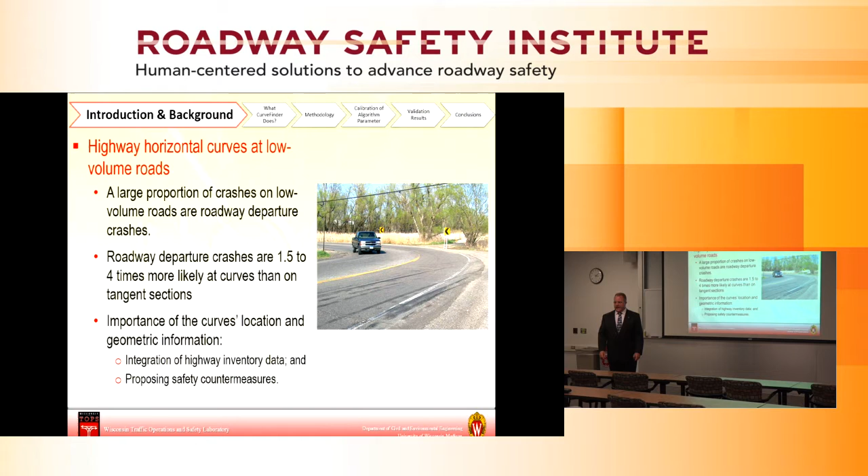What have we done, or what has the world done in terms of trying to address a similar problem? Well, we live in a wonderful world of technology now, don't we? All different types of tools available to us to help solve these problems.

So related to our topic here of horizontal curvature, there's lots of different sources of information now to get a bird's eye view, if you will, of this network of roadways that exist and all the different alignments that are out there in our transportation system.

So we can look at satellite images. We see that online so nicely now, right, with all the Googles and the Bings of the world that provide that information to us free and easy.

Very, very wonderful tool. We can use various other types of GPS survey. There's laser scanning methodologies. Back in my good old day, we actually surveyed it the old-fashioned way, right, to come up with that data. And of course, what do we know about all these different topics here that I just mentioned? It takes time, right? It takes money. They're not always as efficient as it possibly can be.

But what we also know is that there's this big world of GIS out there, Geographical Information Systems. And GIS systems are pretty easy to use. And most states have them in a very usable format.

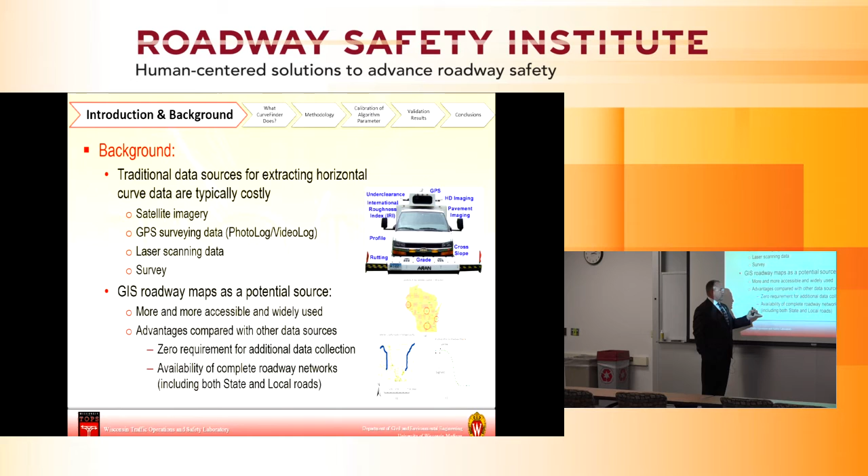Some are better than others. Some are linked better than others. Some have the data better connected than others. But nevertheless, GIS provides a very accessible way with the advantages that I've identified here that says in a very, very, very cost-effective way, we can get this information we're looking for and get the information we need to make important safety-based decisions. Do you all agree with that?

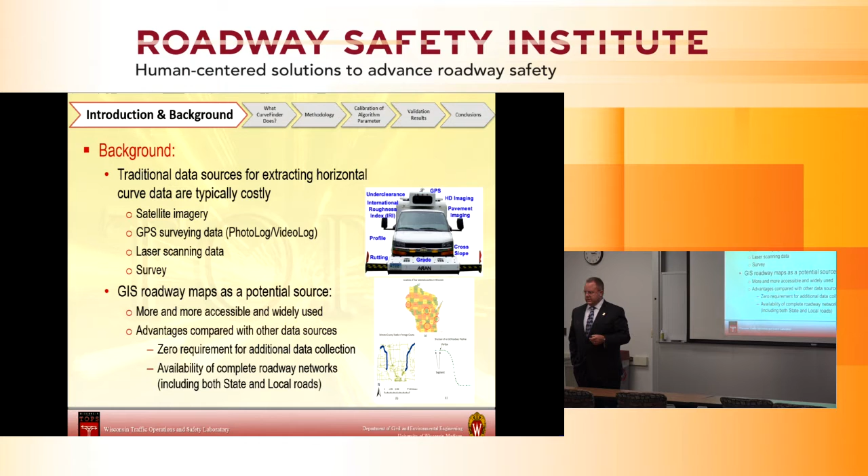So let's look at it a little bit further. So here's what we thought. So we came up with this acronym or this word Curve Finder just to define what it is that we were doing here. And again, we're not going off the deep end here in terms of coming up with this novel idea. We just simply are saying this.

What if we can automatically detect all these curves? Run a simple algorithm, detect the curves, get the curve data, and we're not spending hours and hours and days and tons of money going out and trying to survey in some way, shape, or form all these different types of data.

And if we can do that, we can automatically classify curves and compute the curve data, right, that we all learned in our basic transportation engineering courses, right, the tangent lengths, the radius, the degree of curvature, all those very fundamental things that are part of every transportation course. If we can do all that in an automated way and then create the GIS information that we need in a layer that can overlay the various systems that exist here, wow, that's not bad.

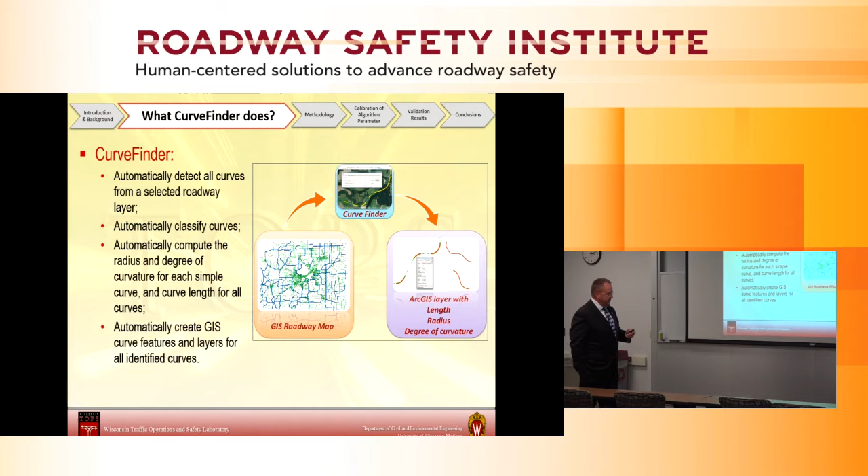Pretty good stuff, right? So we'd have the information we need and we'd be able to use it in a good way. Now, were we the first to think about this? Gosh, no. Lots of people have been thinking about this, including the Federal Highway Administration.

Some of you may be familiar with this model inventory, or model inventory roadway element, so the acronym MIRE. Lots of information, so I just put a screenshot of the website up here, so if you're not familiar with it, you may want to go out and take a look when you have some time and Google that.

But there's lots of information, and the whole idea of coming up with a set of important data that are necessary if we're going to make good safety-based decisions across our system. Okay? So we have all this, and the reason I'm pointing this out to you is we wanted to make sure...

...if we're going to go down this road of developing something that we call Curve Finder, that we don't want to forget about these important other sources of information that exist. So we want to parallel it and use it and perhaps make it a little bit better if at all possible.

So we said, well, let's look at some improved way to do it. So we certainly want to be compatible with the MIRE federal system, okay? And we certainly wanted to be able to do the same things that MIRE does, such as identifying different curve types, whether they're traditional circular curves or perhaps they're compound.

We want to be able to look at the angle points. We want to look at the independence between the curves. We want to know if they're reversed or not, and all the different combinations of curvature we can have along any type of roadway that exists within our system.

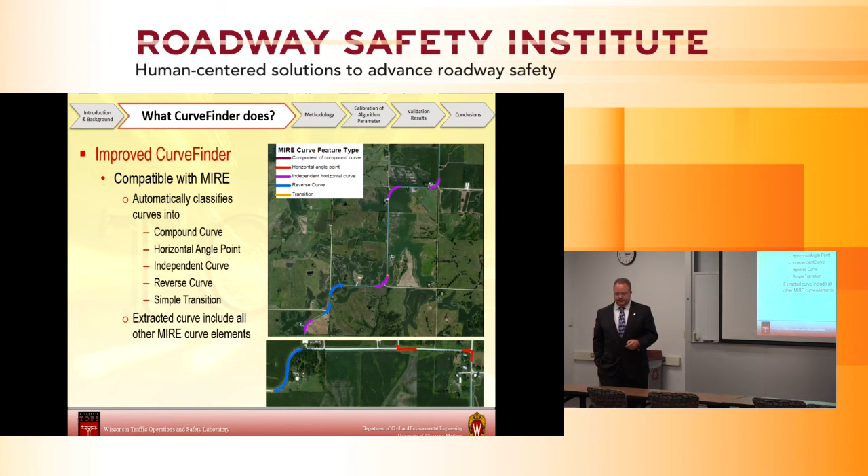So far, so good. Right? Everybody with me? All right.

Now, the one thing we simply can't do under this methodology is superelevation, determining how much we're banked. So that's still a challenge. Every researcher has a future research component at the end of their work, and I'll tell you right now, that's one of them. How do we do that? That's a little bit more challenging.

But with the ones we can handle, including curve feature type, the degree, the radius, and all the other fundamental parts, those are very doable. So what we're looking at is identifying the angle point, looking at the independence, or what type of curves we have out here - are they reverse or compound? But what's going to be the challenge?

What's going to be the challenge? Well, we don't have the perfect world out there. Not every horizontal curve is nice and smooth. We have curves that snake, that aren't as easy to identify in an automated way. So we're going to have to find a way, when we have these unequal or irregular - however you want to describe it - compound type curve, how are we going to be able to identify that within the system?

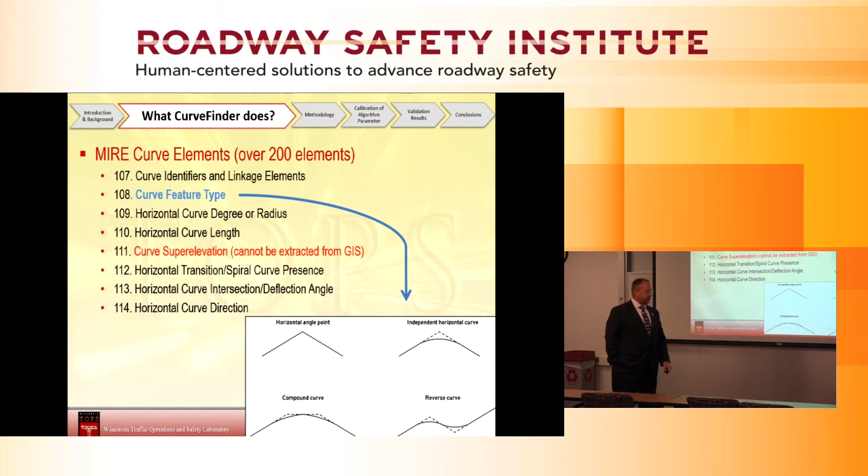So we dug a little deeper into the GIS world, and I'll be the first one to tell you that's where my research team comes in. That's not my in-depth expertise in understanding the ins and outs of the software. But like we say in research, you learn enough to be dangerous. So I can tell you a lot about it, but if you want to ask me how to operate a GIS system, save that question for another day, because I'm not going to be able to answer that for you. But we will be able to talk about some of the details.

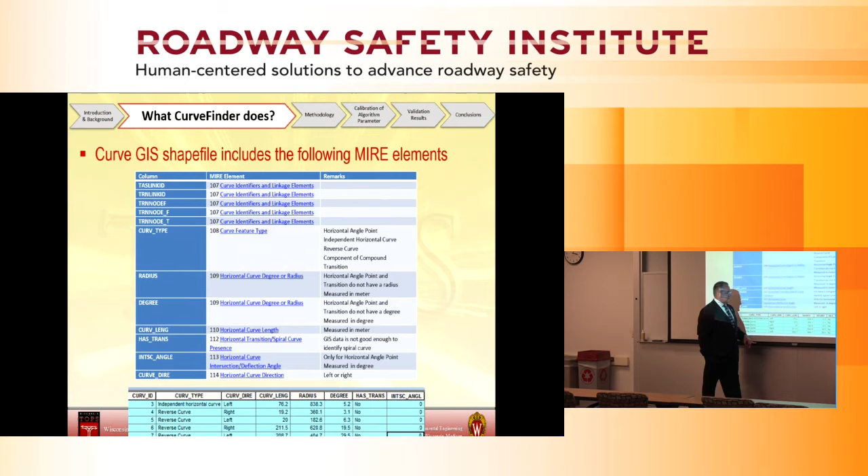So again, we're digging a little bit deeper into MIRE and the other things we want to be concerned about, and it gives us a whole array of things to say, well, if we can't make the system better than this, then why? Let's just stick with what we have in this program and this database. But we thought we could make it a little bit better, a little bit easier, automate it a little bit, and then develop different types of systems to get to this fundamental curve data we're looking for. So, Curve Finder.

The bulk of it is super, super easy. What are we trying to do? Well, I'm going to work backwards, meaning at the end of the day, once we've identified this curve in our system, we just want to identify the PC, the PT, and then overlay the fundamental components of a horizontal curve, and then tell you what the radius is, what the length of the curve is, the tangent lengths, where the PI is, etc. That's what we want. That's the data we're looking for.

And in order for us to do that, we're going to have some sort of algorithm here. This is an algorithm in and of itself in making this calculation, but that's an easy one. We need to have some form of an algorithm that's going to tell us what kind of curve it is - simple horizontal curve, nice circular curve, is it compound, is it reverse?

Is there some spacing between the curves like there's supposed to be, at least according to the geometric design manuals that we all know? So we have all these other things that we have to identify, so we need some sort of algorithm to do that. But here's the key one: somehow or other we've got to know if it's a curve or not.

What we do know is that in these GIS databases, we have segments and we have vertices on each end of all these segments, and they're all linked together. In some databases, we've got to spend time with another layer of analysis to make sure we're all linked together in a nice continuous way. Some databases need to be cleaned up more than others. But once we have this linked system that goes all the way through our roadway alignment, we can begin to look at how to connect the dots, and what's happening from dot to dot, or vertices of all these segments in GIS, in order to determine what's happening from a curve standpoint.

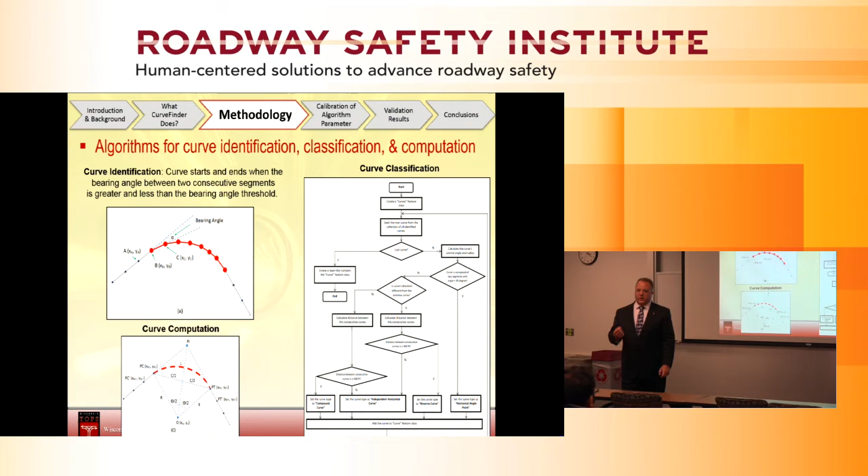So for those of you familiar with GIS and ArcGIS type tools, what we're simply doing is developing an ArcMap type add-on that we call Curve Finder. We're building it through a number of different packages, and at the end of the day, we can look at these various maps and identify in an automated way where those curves are. Simple as that.

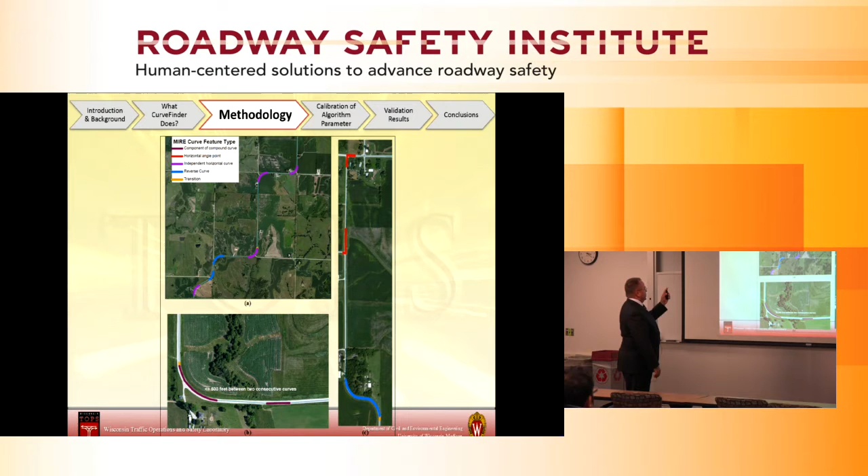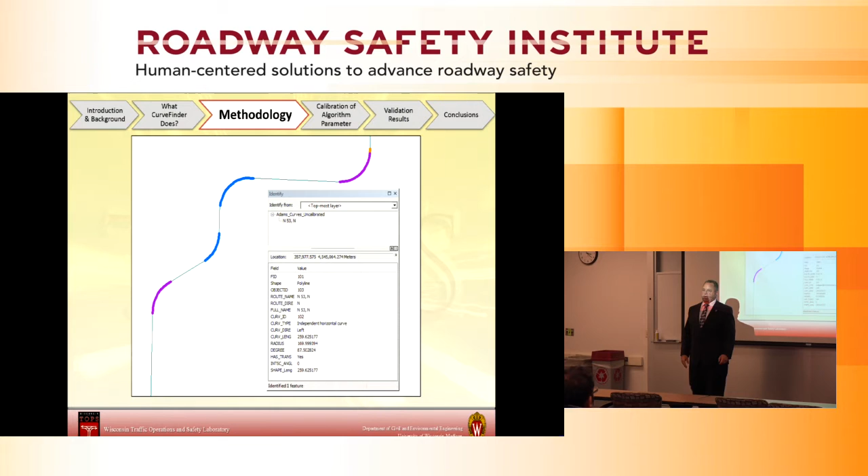I've already shown you some of the MIRE components, so we're doing the same thing here, I think we can skip that. At the end, again, we're doing the same type of thing, now just in a more computerized frame and format, identifying through all the variables in the algorithms and software, all the different types of curve length, curve direction, types, degree of curve, etc. All right, well, we developed these algorithms.

Got to try them, right? So we went to a couple counties in Wisconsin that had very nice GIS maps, one being Adams and one being Taylor. We ran the algorithm. This is what we got. Well, it doesn't look like much of a piece of information to you, does it? Just some line maps with little colored dots all over them. But what we learned really quickly was, hey, this thing might actually work.

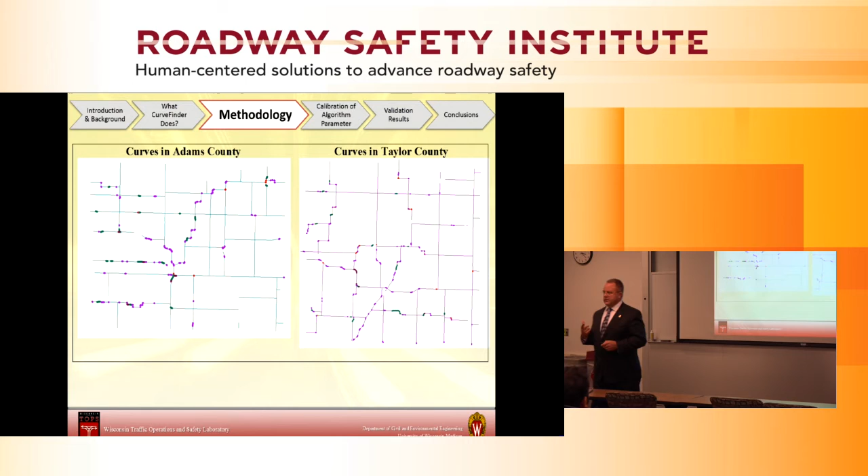It's nice when research leads to something productive that you can use. And we saw really quickly that we can identify all different types of curves in a relatively efficient manner. So the question is, what is the accuracy of this, and what else do we need to do to make sure that we are operating in a great way?

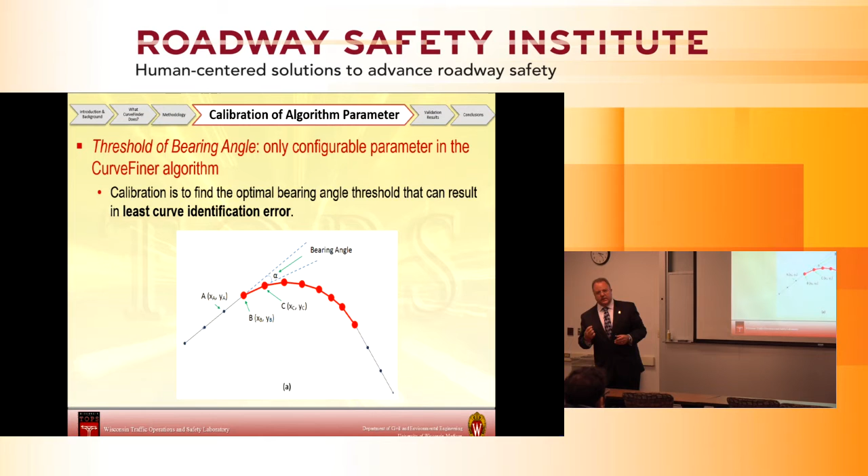So again, I told you this bearing angle is really the million-dollar question. We had to spend some time thinking about when we do have errors, what are the errors? And the one thing that we can calibrate in terms of the identification process is this bearing angle. In other words, what is the optimal angle of detection to maximize the probability of detecting a curve when it is a curve, and not detecting a curve when it's not?

Okay, so we spent some time on that. And going back to our fundamental world of statistics and error development and all the other things you've experienced, we went back to the simple type 1 and type 2 errors, and said, well, what can go wrong?

Well, we can have what we'll describe as a type 1 error, where we failed to detect there was a curve. We can have some part of the curve missing, we can have a lot of the curve missing, we can have most of it, or we can just miss it altogether. So we have some error along those lines.

Or we can have the type 2 error on the other side, and that's misidentifying a tangent section as part of the curve. In other words, looking up here and saying this is a curve, when in fact it's not.

So like all things with type 1 and type 2 errors, what's the worst case scenario? Would you rather have a type 1 or a type 2 error? And the answer is pretty simple, right?

So put this safety hat back on. If there's a curve there, we better be able to identify it. We don't want to miss a curve, right? The tangent stuff we can deal with, but if a curve's there, we don't want to miss it. So we had to think about that very, very carefully.

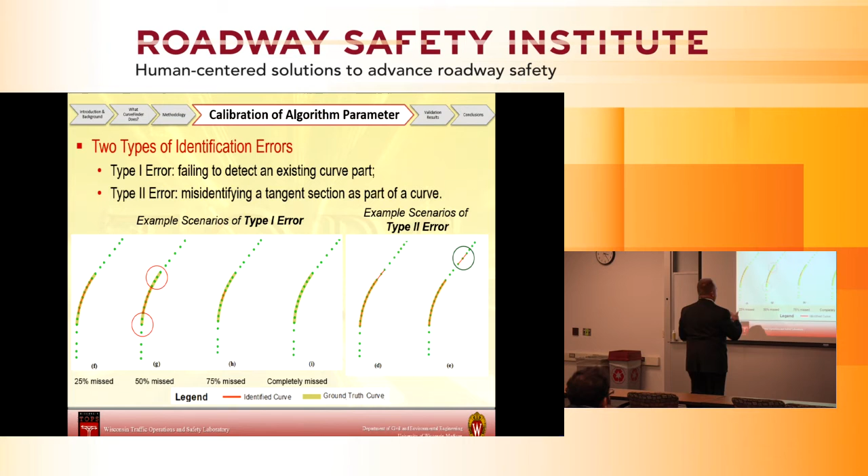So we came up with several measures of effectiveness that I won't drill down to the details on for you, but simply say this: we can look at different types of identification rates.

We can say that some percentage of the curve segments are successfully identified, obviously that's a good thing. But then we'll relate those to the type 1 errors, and then we'll come up with another measure for the type 2 error rate, and we can look at them both together and bring them together to help us find what that optimal bearing angle or degree of curvature detection is.

That make sense? So in a simple way, if we start to plot this out, we can say, and this is no surprise to you I'm sure, that the lower bearing angles here has the highest probability of being detected, right?

So if we have a very low threshold, anything bigger than that's going to be detected, and there's a curve there, so we have a very high curve detection rate.

And it works on the opposite side with type 2 errors, that if we set the bearing angle threshold extremely high, well then we're going to definitely miss curve and tangent sections, depending upon what the situation is we're experiencing out in the field, or with the mapping that we're using.

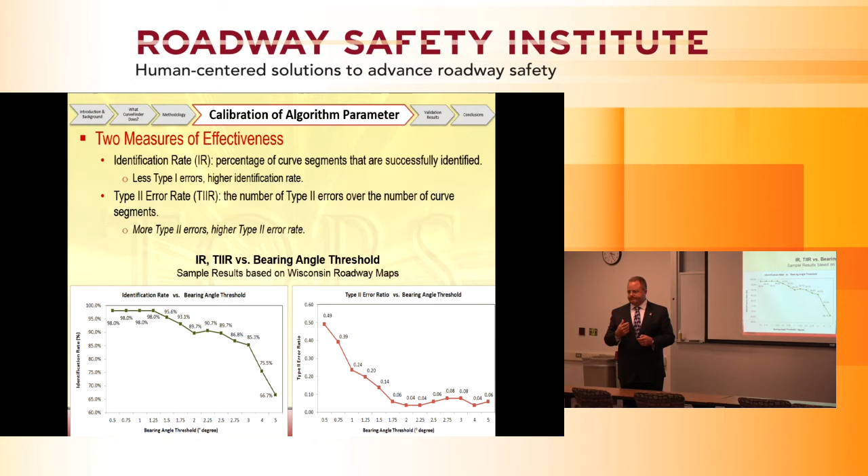Okay, so we can bring them together, and we looked at a number of different ways to try and unify this, but we said we want to put a little bit more emphasis on the type 1 errors, because those are the ones that are critical.

And depending upon where we're working, this was a case where we looked at all the curves in the state of Wisconsin. So we ran the entire state, and we had thousands and thousands of curves. We had, in certain situations depending upon the bearing angle, the minimal number of errors, right? So the number of curves that we weren't able to effectively identify.

So with this in mind, it started to become pretty clear that somewhere around 1, maybe 1.5 degrees, became a good location of a starting point of a bearing angle that we can use.

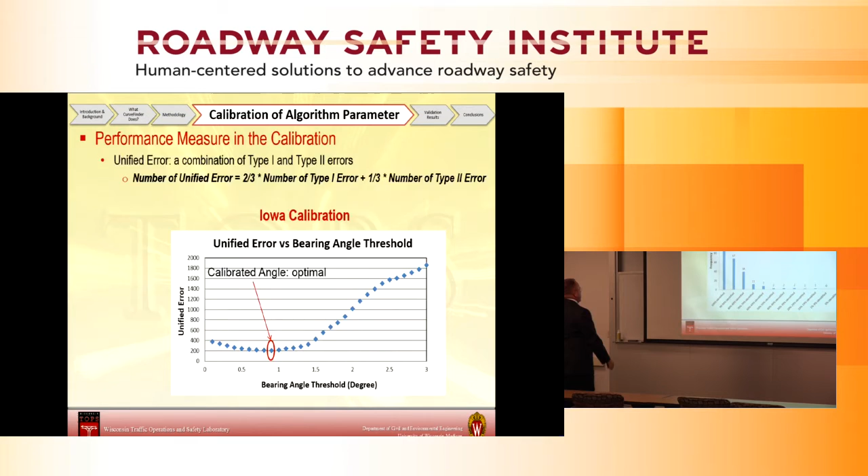And when we did that, here's an Iowa set of data from the analysis we did there, and then we took that information and said, well, let's get a segment of roadway that we have ground truth on. We know the curve data, and we can compare a known set of information to what we developed in our algorithms.

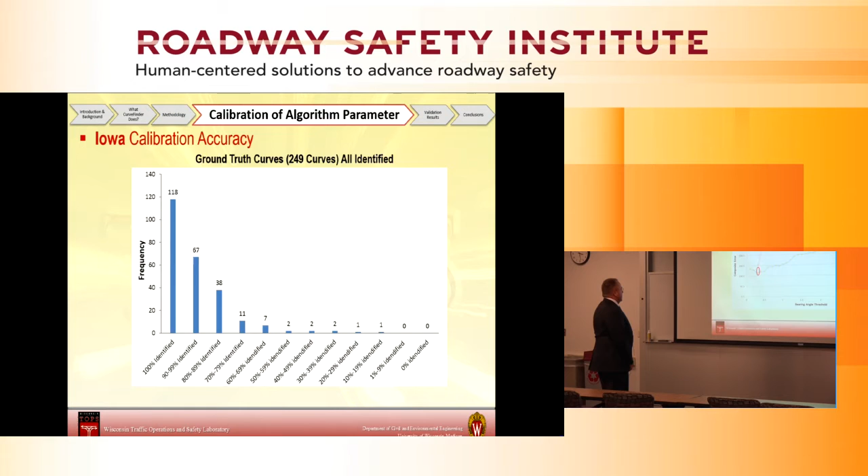We looked at a number of other states, so I'll skip through the details of each one, but we've now had an opportunity to work with a number of states around the country who saw, perhaps like Professor Donath did, this paper at TRB and said, well, this seems like a good idea. Let's apply it to the curve data and the GIS databases we have in our state, and does it work?

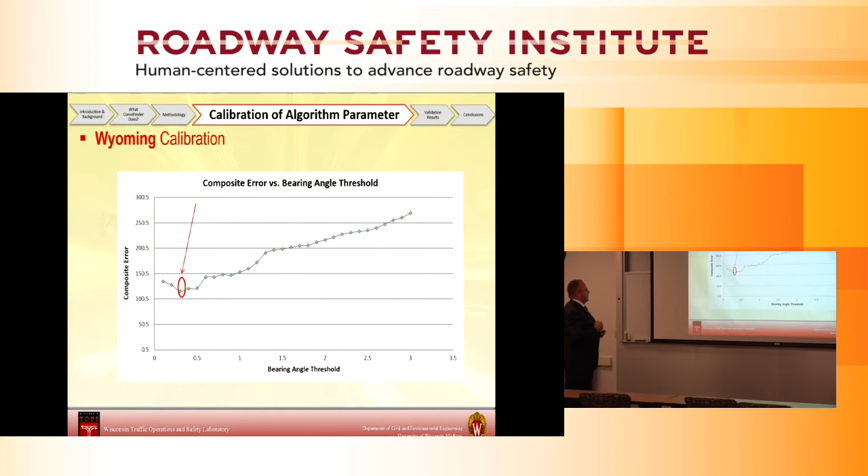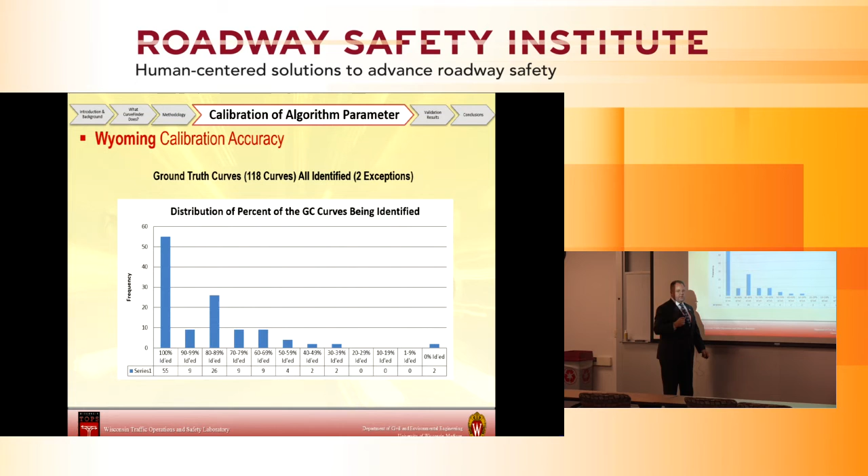So Wyoming was another one, and we again go through the same calibration process and identify about where the appropriate bearing angle is based on the roadway systems that exist in those communities. So again, through repetition, we start to drill in at the appropriate way to calibrate these models. And as we began to learn more about calibration, do we still have errors of identification, or at least in part? Yes, but we're starting to get very effective in identifying curves in an automated way.

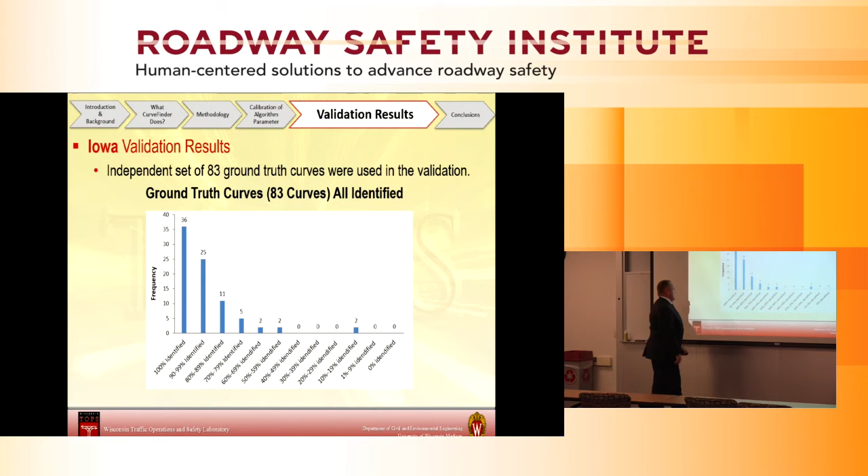We did some additional analysis in Iowa, and here's some more. But what you like when you do this type of stuff is a plot that looks something like this, right? So we're getting a nice identification rate here, and I think those are things we've already talked about before. Same way with Wyoming. Once we applied a number of ground truth related applications to it, we saw very good numbers here at the upper end.

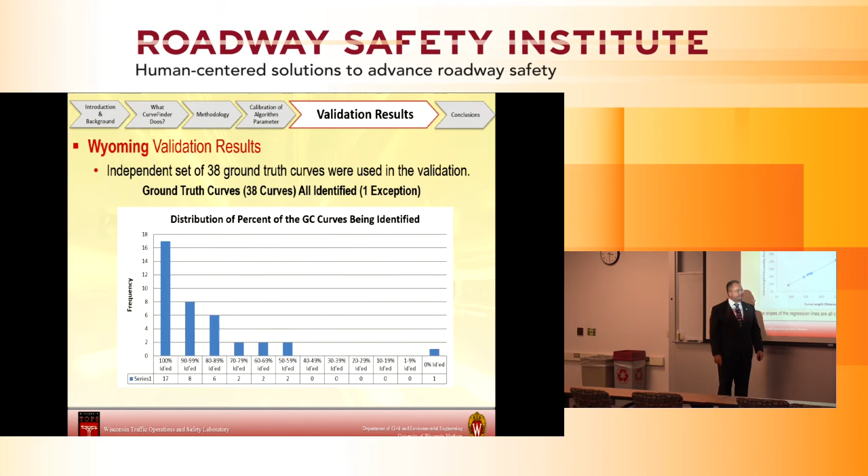So the last thing we had to do to validate it is say, well, okay, so we've identified the curves. For the most part we didn't get them all 100%, but we got the bulk of the information. But what was that last algorithm that we had? That last algorithm then took all that information and turned it into radius, degree of curvature, tangent lengths—all the very fundamental components of a horizontal curve, right?

So when we looked at that and talked about curve length first, as we've identified in a ground truth format, and what we were then able to calculate from the algorithm—if the algorithm was doing a good thing, then we would have a nice even line here, and we'd have an r-squared value of 1, right? The data is all the same. We were pleasantly surprised to see that we can be pretty close to the actual data with some of the calculations that these algorithms are doing. So when we looked at curve length, degree of curvature, and curve radius, we got very nice results in comparison to the actual data versus where we were identifying.

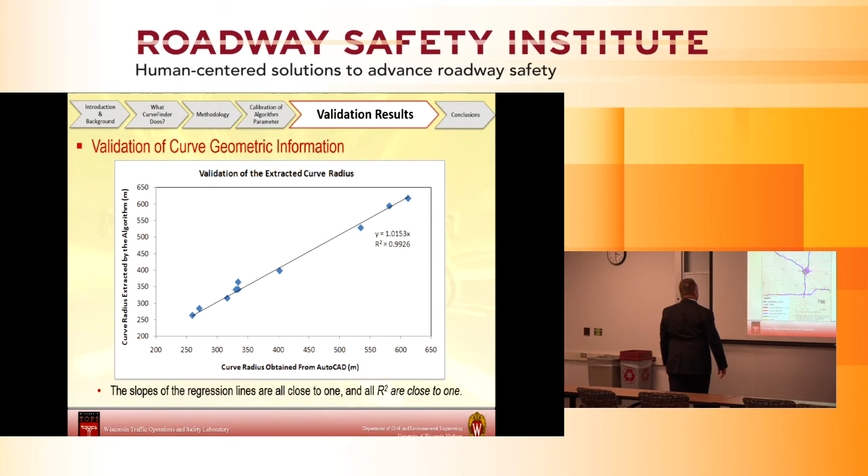So good news, right? Well, of course we had to run it in Minnesota, otherwise I wouldn't have been invited up here to talk, right? So I had to run Minnesota data, and we have talked to MnDOT a little bit about this, but have not gone through the full calibration process and trying to identify and see what percentage of all these curves we're able to get. But nevertheless, running the system, the interstate system—which I think at least in the data we looked at, about 700 and some curves were identified—and then some of the state route systems, approaching 3,000. On an initial scan, just using our trained eye, it seems to be working very effectively as well with the GIS database in Minnesota.

And every state has—I don't know what the right word is—like a flavor. A roadway has a flavor. Does that make any sense? Right? So different curves, different design practices, different ways of laying out. A lot of that has to do with the topography and geography and all the things that exist wherever it is that you live. So every state's got a little bit different flavor of how the system works. And as I've shown you, we've looked at Iowa and Wyoming, and did a run in Minnesota, obviously Wisconsin, did some work in Florida. And we're getting the opportunity to see more and more states in terms of how their world looks and how this algorithm operates.

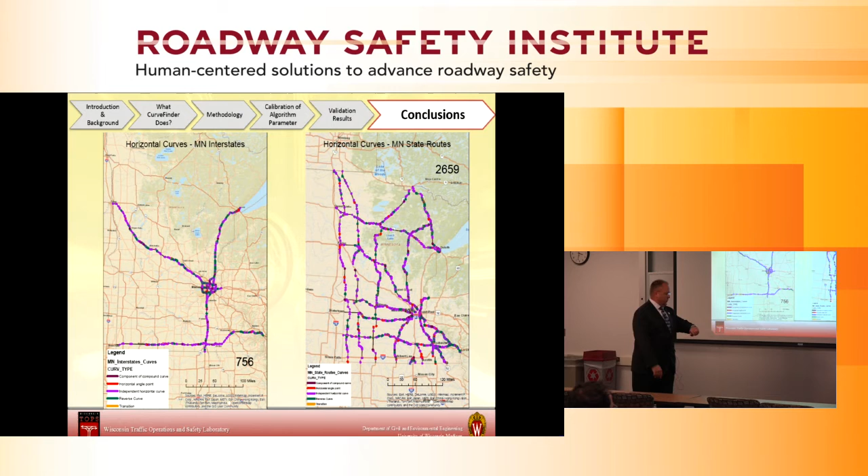So we believe that we have a pretty good system here, and in fact, the other states we've worked with and other database owners we've worked with tend to agree. Is it perfect? No, we can't identify every curve. And as I mentioned at the beginning, many curves aren't nice and clean, there's not the perfect horizontal, smooth curve on every single curve that exists in the roadway system. But for the most part, we can get close.

So we can find useful tools that are very, very easy to use. Literally a click of a button within this GIS format, we can have all the information we're looking for.

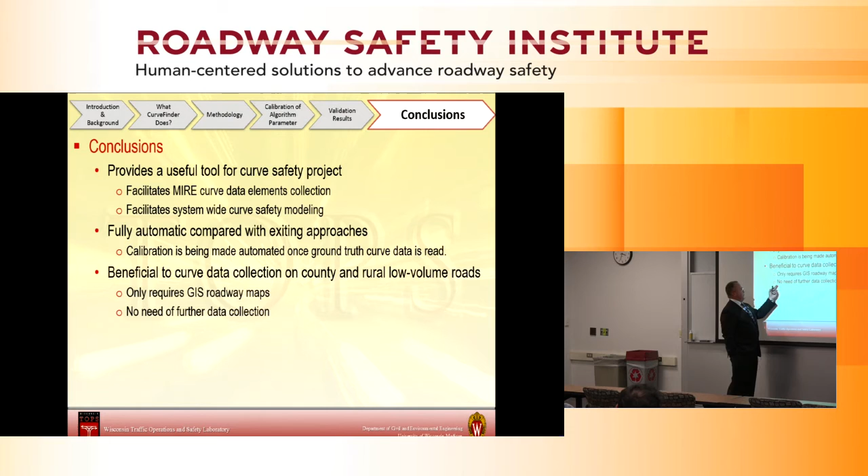So there's automated and highly beneficial ways to collect this, especially when we get to county and rural roadways where the state DOTs are not spending a lot of time, effort and dollars logging this important information. Typically what we would do is look at the higher volume roadways, and often we have that data in a database someplace. But our local roads, county roads, and rural roads are ones where we don't always have that information, so we need to continue to think about it, and we don't need further information to help us.

Now, there's issues, right? This is where you all come in, all you smart people in the audience. We still have some bugs here, and we have to think about how we solve the problems.

A lot of it has to do with the GIS database in terms of segment lengths and the spacing between these vertices at the end of these line segments, and they vary depending upon the database. Some are very tight, 50 feet or less. Some are bigger, 400 feet or more.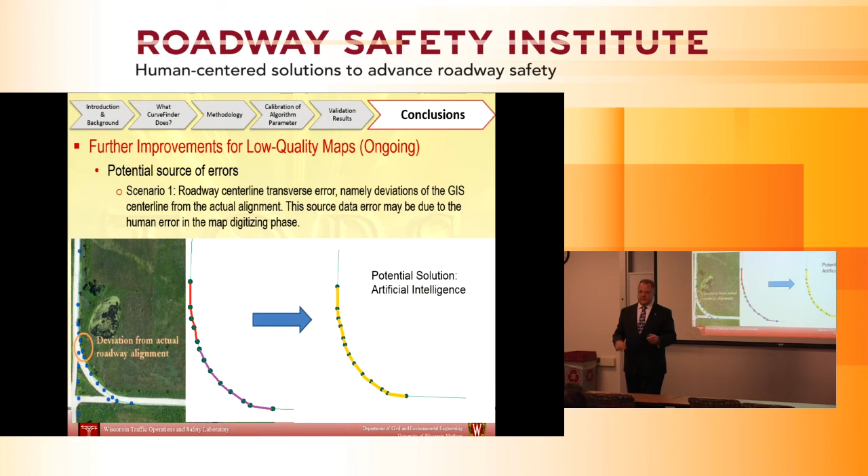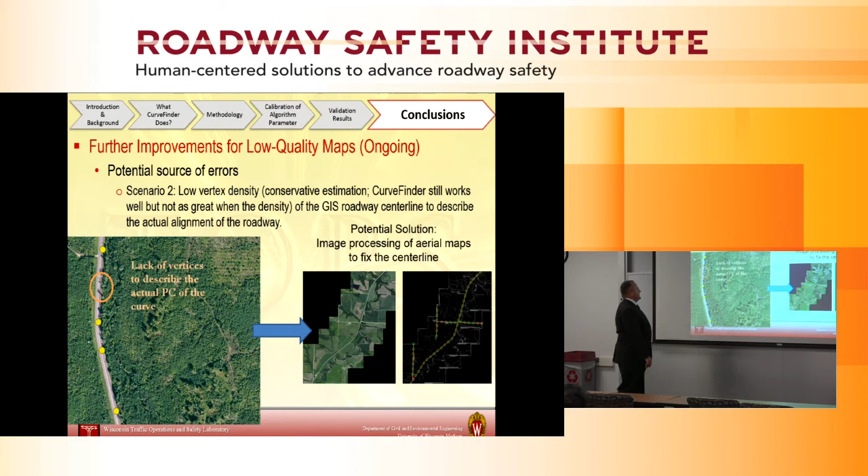So depending upon the database we're working with, maybe there's a way to add some artificial intelligence here to help smooth the curve, so to speak, when we have missing data points or things aren't quite as smooth as we'd like. We can also look at situations where we have very large spacings between these points, and maybe there's a way, again through some sort of artificial intelligence, to fill in the dots, so to speak, to reduce that information so it's able to be processed in an aerial map or some sort of image processing way to make it work. So those are the things we're working on now.

All right, so switching hats here a little bit. Now I've identified for you this very, very simple tool. So what do we do with it? Well, I just showed you we can come up with all kinds of curve information. We can make DOTs and county engineers and others pretty happy by saving them a little bit of work.

But we're talking about safety here now. That's really the whole basis why we, with the Wisconsin Department of Transportation, dug into this problem. We need to know curve data to improve safety, and you can think about all the different safety things a DOT is going to want to know. But there are other places where an automated process like this, using an aerial mapping process, can be extremely beneficial.

So what I want to do in my last couple of minutes here is give you a quick overview of some of the things we did, and I'm hoping you can see the correlation between getting this fundamental data, such as curve data, and then applying it and helping people apply it in ways perhaps we may not have thought about before.

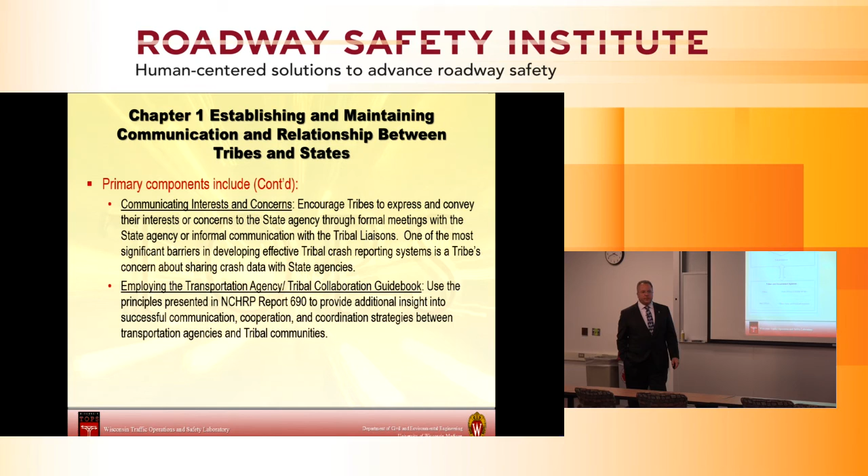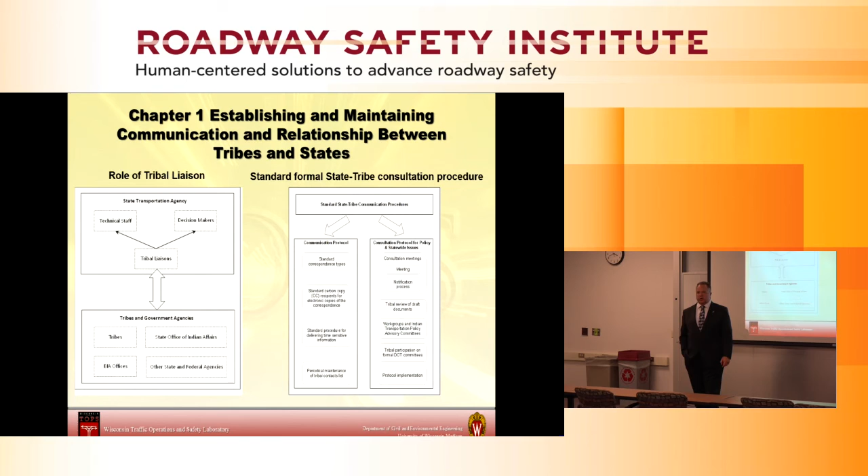When people were effectively communicating, the data was there and safety decisions could be improved. So we helped develop, in a different type of way, a mini algorithm, or some flow charts, to improve the relationships between decision makers and tribal leaders, developing different methodologies for communicating based not only on previous literature, but on things we learned talking to different folks. And then we helped develop methodologies for getting crash data, hence the connection to something like CurveFinder.

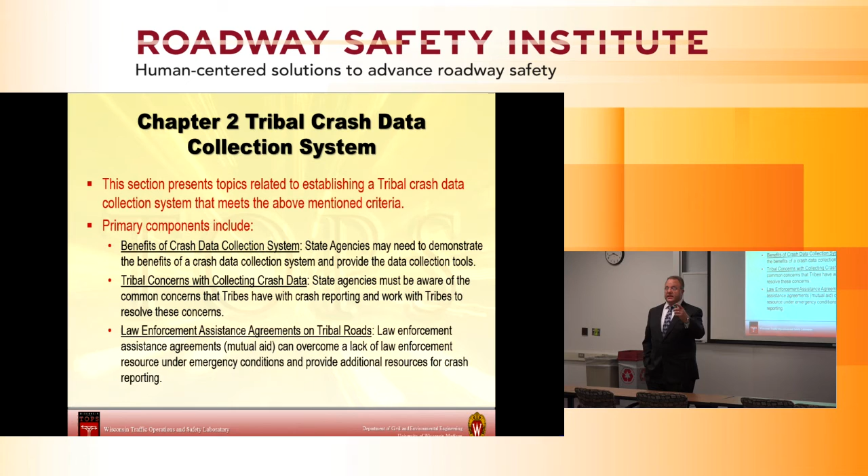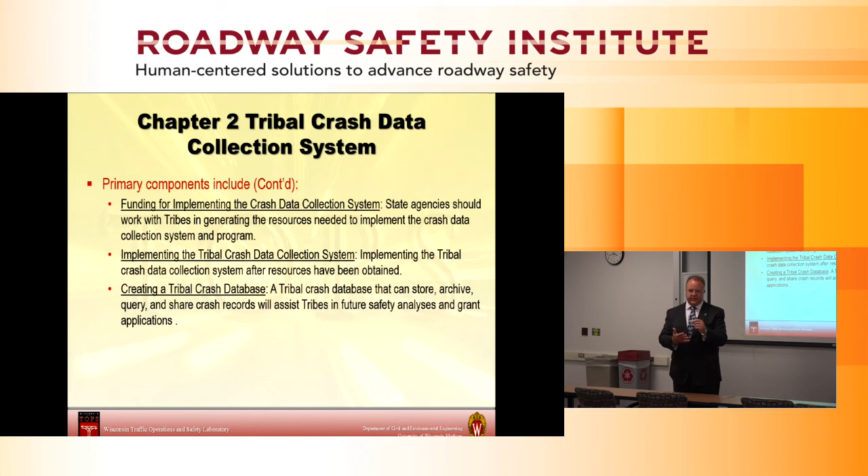We can help make it really easy. We're only talking about horizontal curvature stuff now, I get that, but it's a link to get the ball rolling and help with all that information. We can also help identify the other parts of safety data they need. Oftentimes it's simple working with them on developing the crash identification forms, like what police officers fill out regularly when we have crashes.

We talked about different ways of sharing data. We developed methodologies for sharing, which seem pretty trivial but are important, for how to move data once a crash or some safety element happens—how does it get its way to a database? We also talked about different ways of sharing data to improve that state-tribal communication. Again, the world of algorithms lives everywhere, so we developed little flow charts there, and at the end of the day we can have a methodology that ends up with safety improvement requests.

The other key component here is it's hard to get resources to improve safety if you don't know you have a safety problem. So what these communities are looking for, like all of us, is dollars to make safety improvements. So at the end of the day, there was a cost component and a benefit-cost component that would help tribal communities request the funds they need to improve safety.

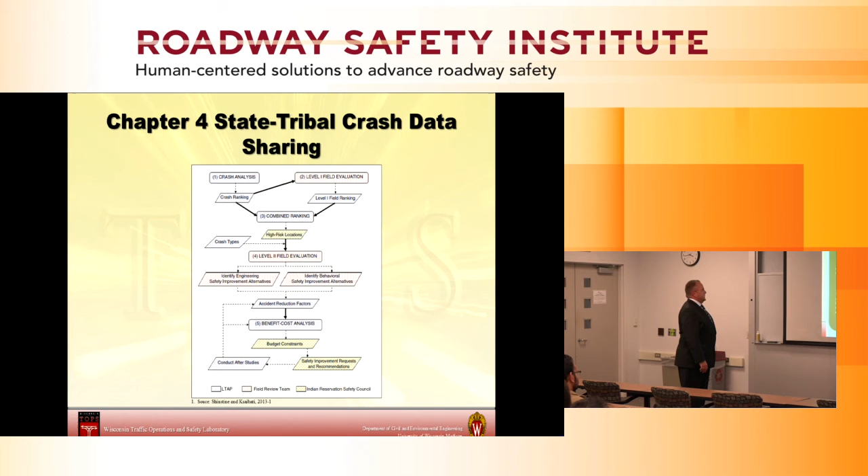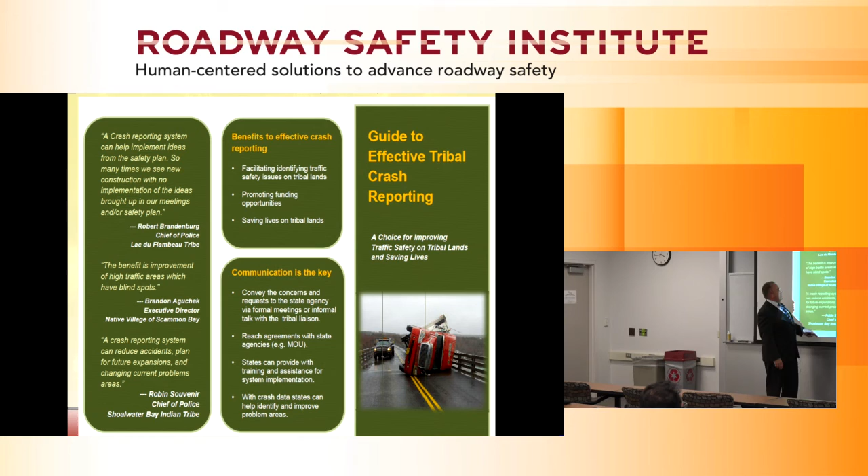The last thing we did was try to improve the flow of communication. We created very simple brochures that we could get to the tribal leaders and elders within the tribal community, saying, well, you may not have thought about this, but here's some things you can do to improve communication with your various DOTs or within your tribe. And like all types of PR information like this, you put in quotes from others who've done it and had success, hoping that'll stimulate you to move along in that way.

That turned out to be very effective. People are using this—Federal Highway Administration continues to hand these out, and it's included in the NCHRP report as well as case studies. So a lot of people responded well, saying, well, here's what Tribe X did, or here's what DOT Y did. It turned out to be very, very effective.

So what I tried to do here was give you a simple example, talking about another project, but going back to the CurveFinder component as well. There are all different ways to approach the safety problem—there are global ways, thinking about the safety problem across a broad array of conditions, states, the county, the community, or the country, wherever you want to look. And then there's the micro level—simple horizontal curvature. All of it's important if we're going to solve the safety problem we have.

And we all know we're heading in the wrong direction, at least in Wisconsin again this year—fatalities are way up. So this regression to the mean thing perhaps is bouncing its way back in the opposite direction. But nevertheless, we still, as a community, all need to work together to help solve the safety problem. In a very small way, that's what I tried to present to you here today—two simple things we've done at the University of Wisconsin as part of the Traffic Operations and Safety Lab to work along those lines. Thank you for your attention.